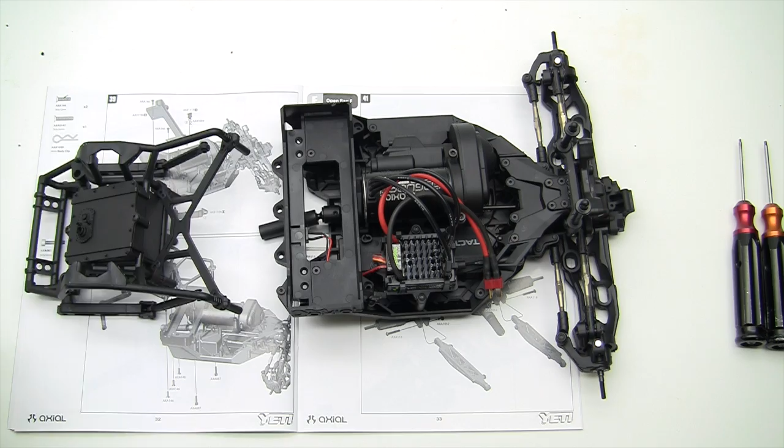Okay, rock and roll hoochie coo here. We are on to step number 40, and we are getting bigger and bigger and bigger. So we had to back the camera out here a little bit to get more room.

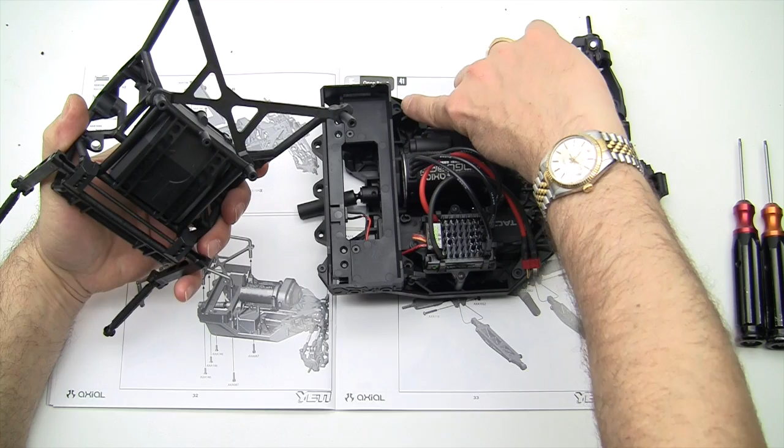Okay, we're going to install this back pod. These two feet here go into these dimples down on the back end of the battery tray, and these three go into these three holes right here.

So let's go ahead and snap that down in there. Everything should fit into the holes. You may have to do a little bit of work here to get them in until everything slips in the way that they should.

Now we're going to turn this upside down like so. According to the directions, we're going to use the two big cap screws here, and these are going to drop down into the holes here, and we will tighten them up.

Haha, you know what? I bet that's a different size wrench than what I have. Let's double check. It is. It's a bigger one, you see?

Let's go ahead and give this a try now. It's going to take a little screwing to get them in there. Just keep going until you feel it get tight. Come on, here we go. We're going. Okay, I feel it, there we go. We're tight now. Let's get the other side going.

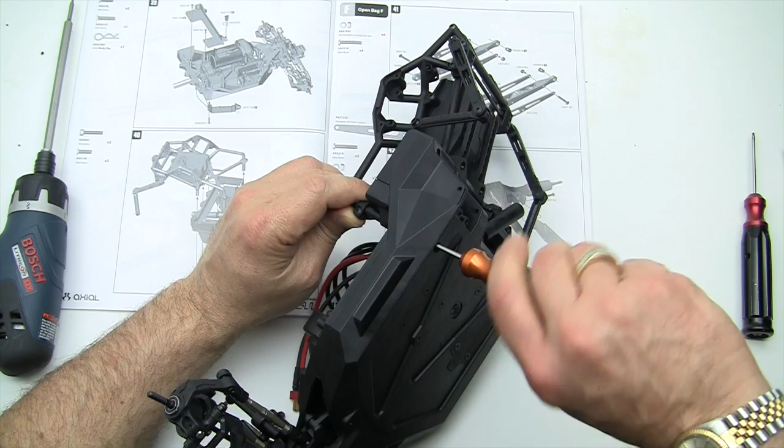Okay, now that's all sucked all the way in and nice and snug. You don't want to overdo them.

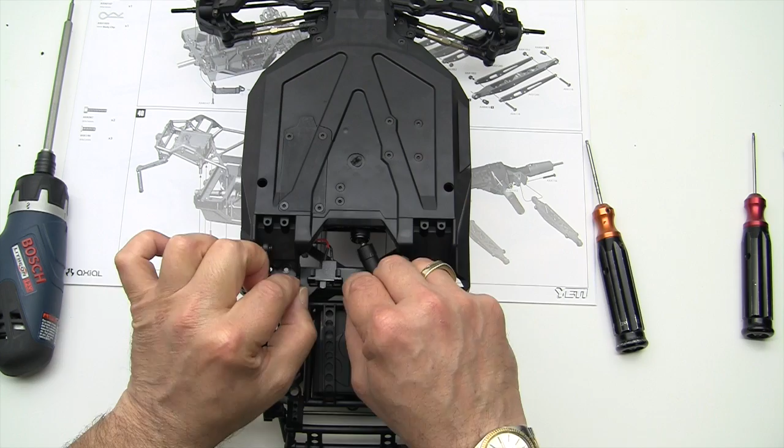Now we're going to visit these three holes back here, and we're going to put the beveled screws in there and tighten them down.

Okay. Got some visitors out in the warehouse there talking loud. Sorry about that.

Okay, those three screws are in, and we have completed step number 40. We're starting to look more like the Yeti that we're building, rather than little pieces and parts.

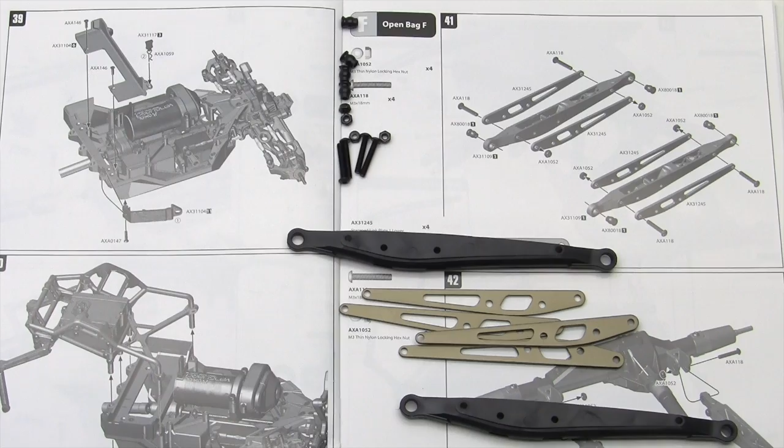Okay, so we're going to set this aside, and we are going to move on to step number 41. First thing we need to do is open bag F. Get all your pieces and parts out and ready to go.

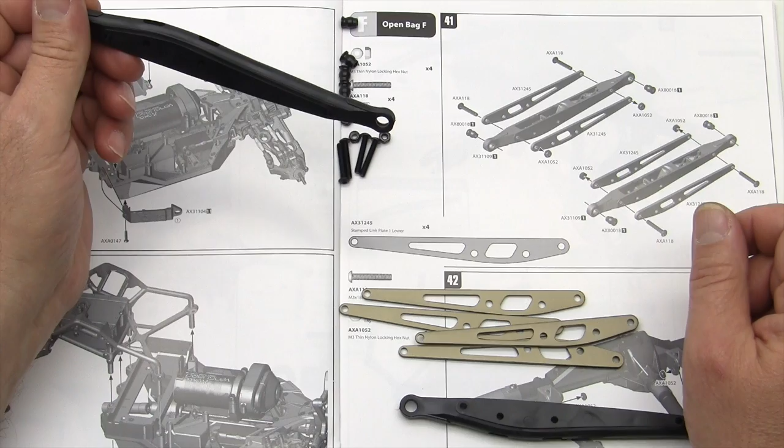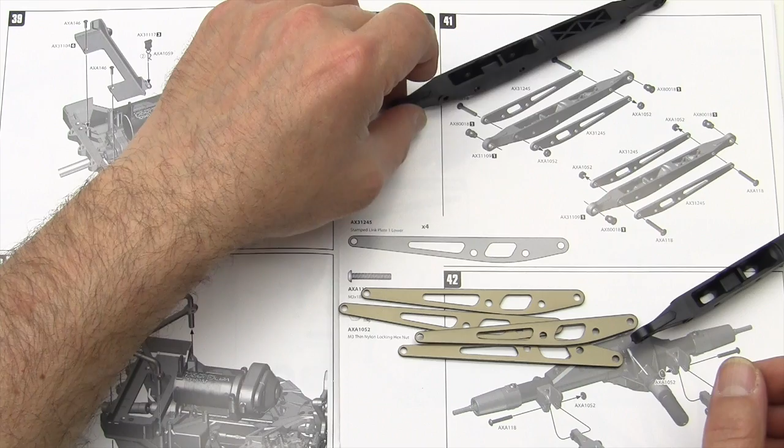Now we're going to build these two links, and you need to make sure we build them in the right direction. They're both identical, but by right direction, I mean you have one on the left and one on the right, and you want the screws to go in this way on both of them. If you take a look at the directions, it'll show you there.

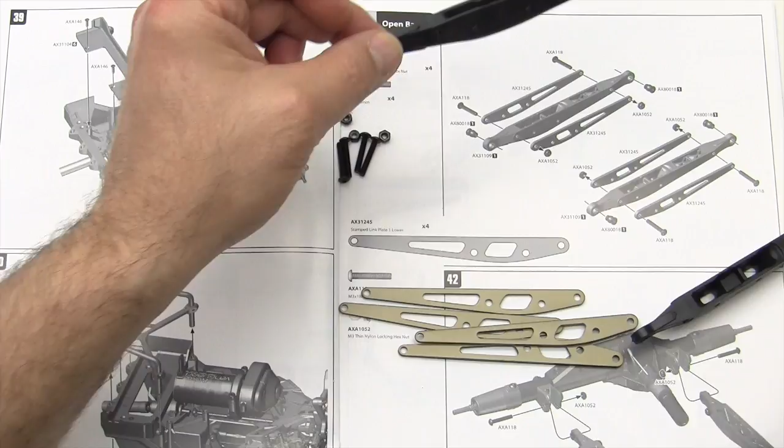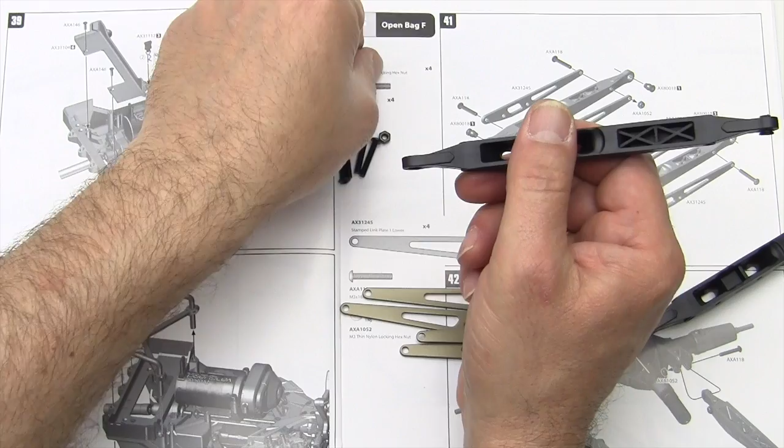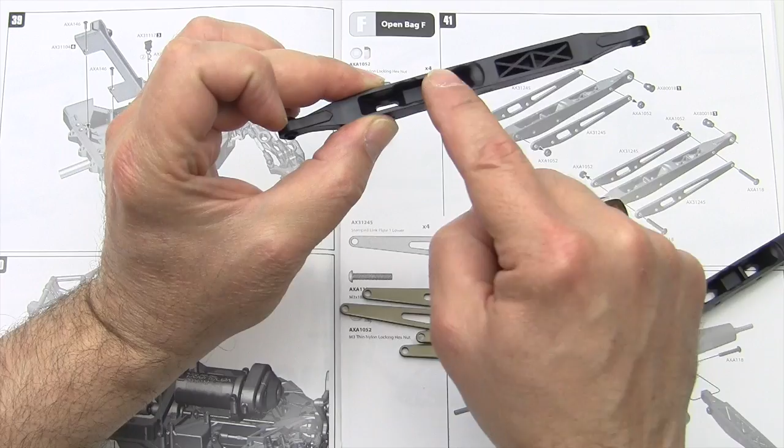Let's go ahead and start by putting in our little swivel balls, again following the directions on which way they go in. Just like so. You also want to make sure that the open part here is facing up, and that the fat part is facing forward. So we've put those in.

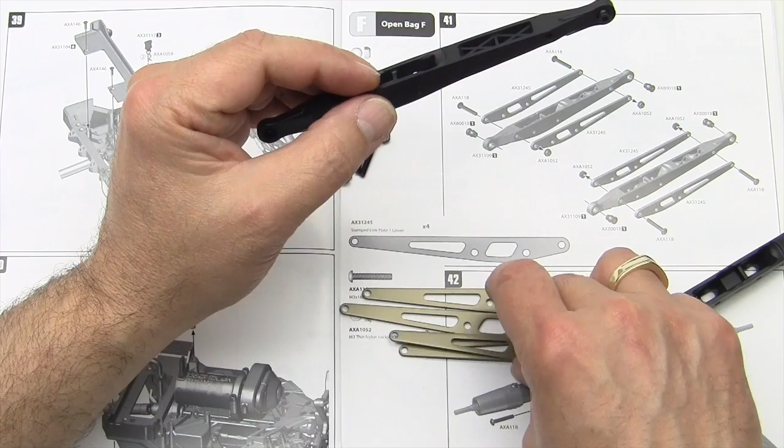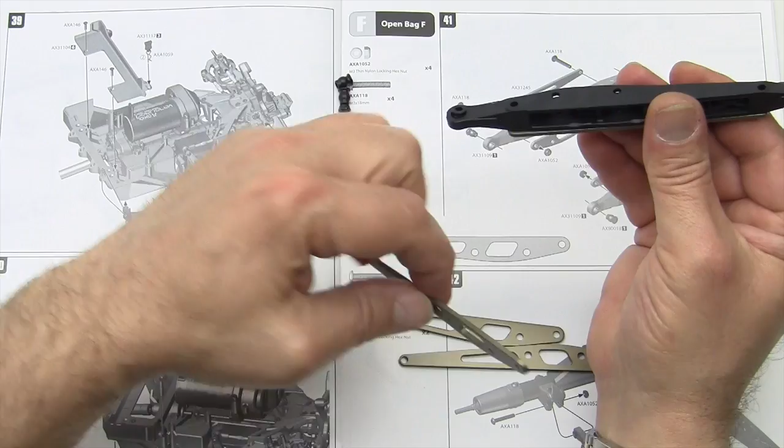Now let's take our link plates and we're going to line those up like so, on both sides. It's actually probably easier to do one at a time and pass the screws through, but we'll do it this way, passing the screw through the front and the rear holes.

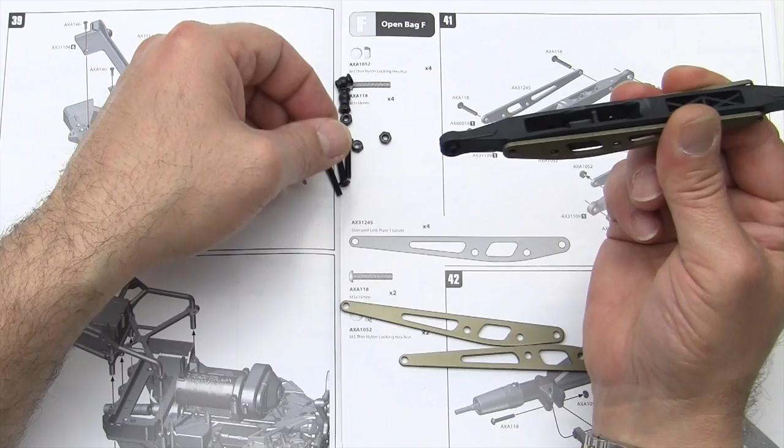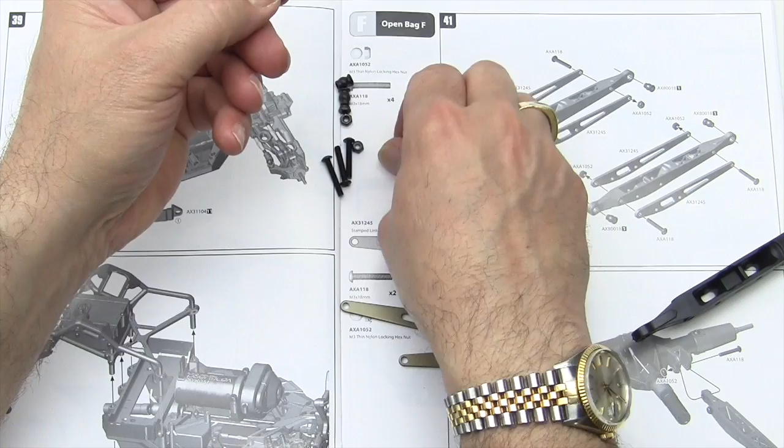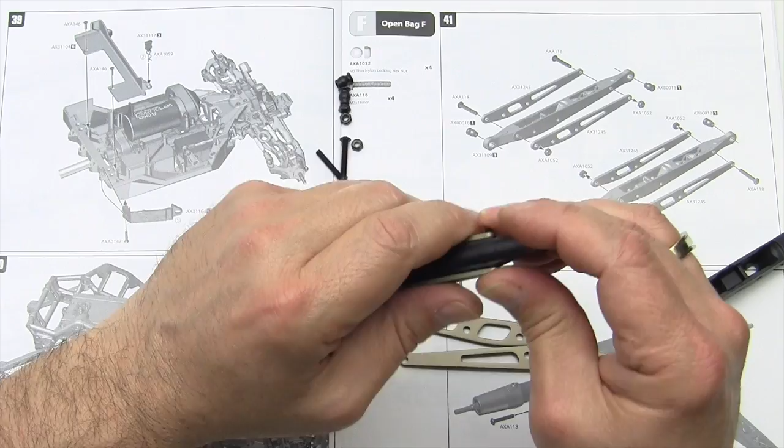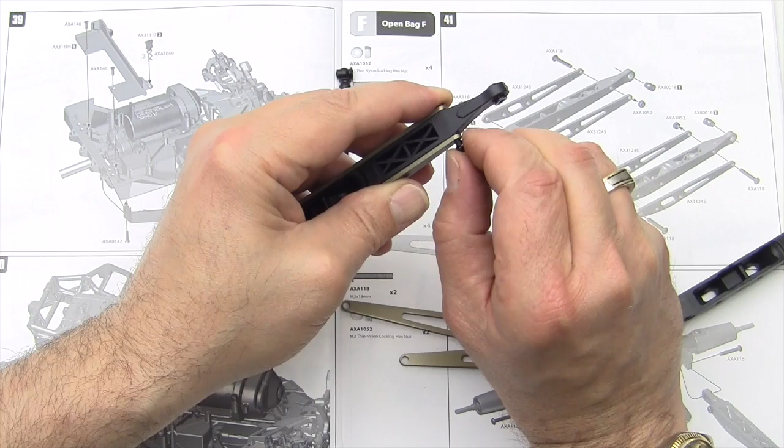We'll start by doing that and putting a nut on here, making sure they're all on in the right direction. Pass the screw through the back and put a nut on there. Come on, little nut, I have big fat fingers. There we go.

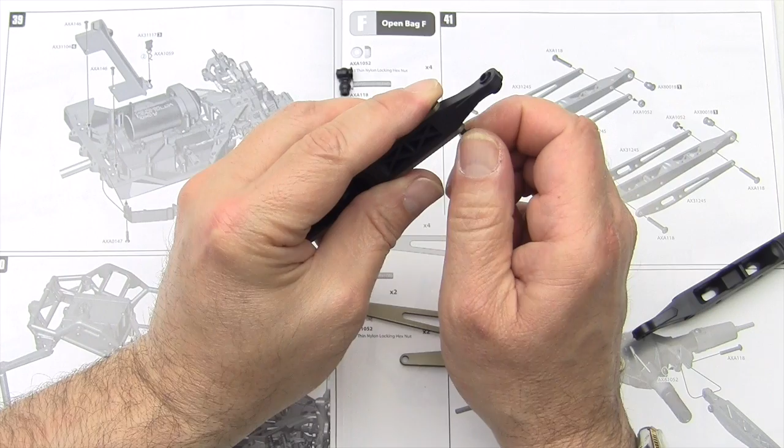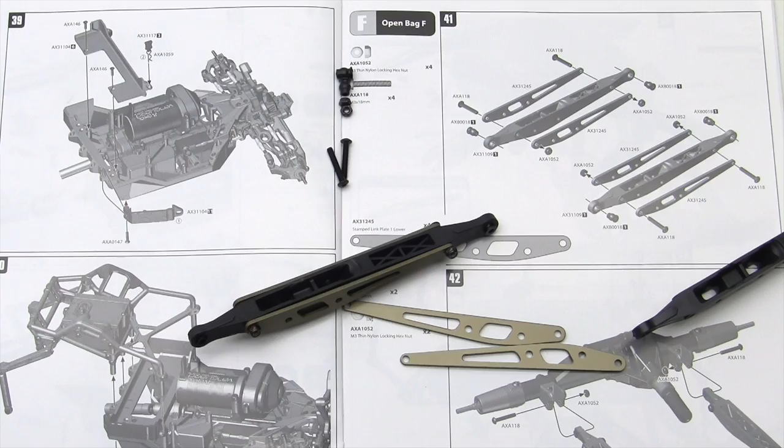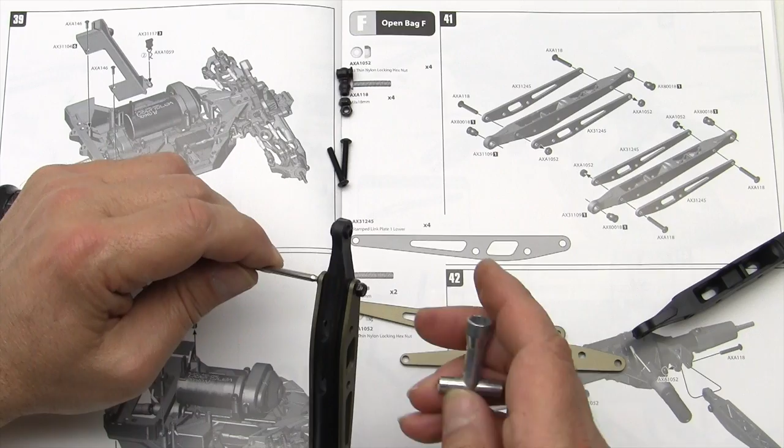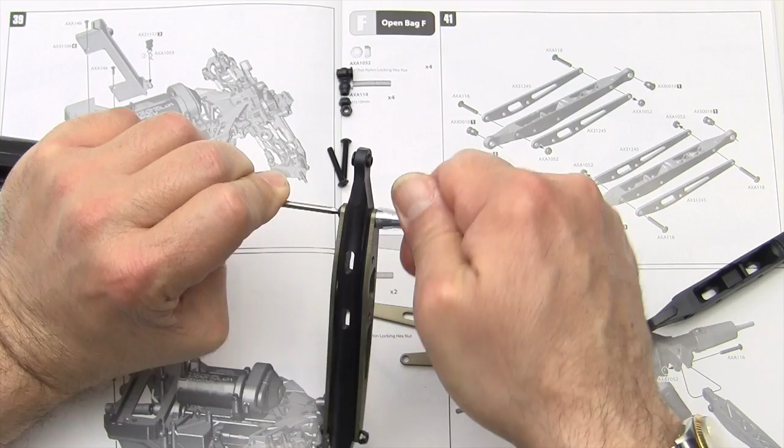Okay, somewhere on my bench here I have a little multi-tool. There we go, and the screwdriver. Let's go ahead and cinch these up. Nice little stiffener plates. Okay, there's one. Don't know why we're not putting screws in the middle ones yet, but I'm sure there's a reason.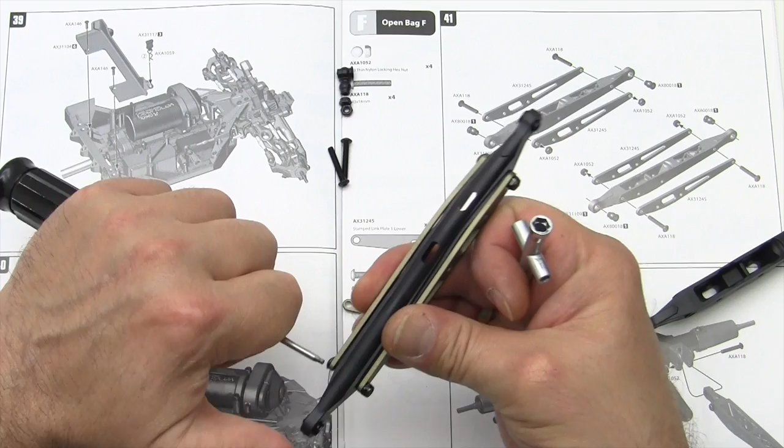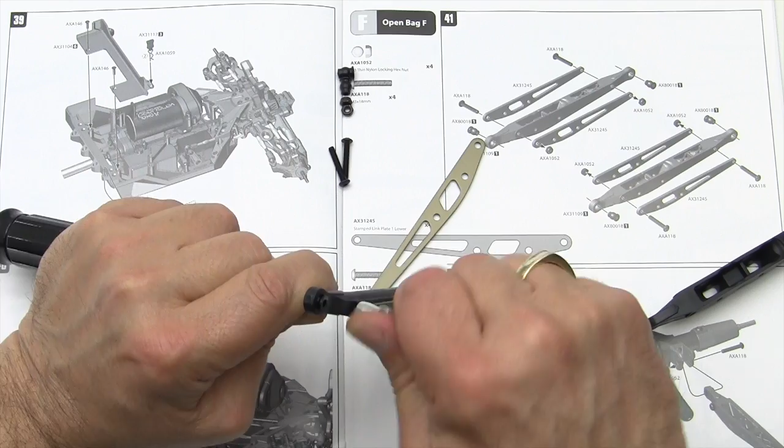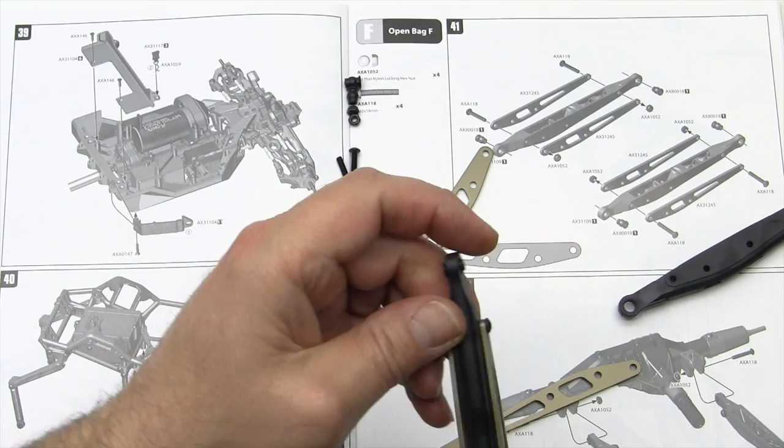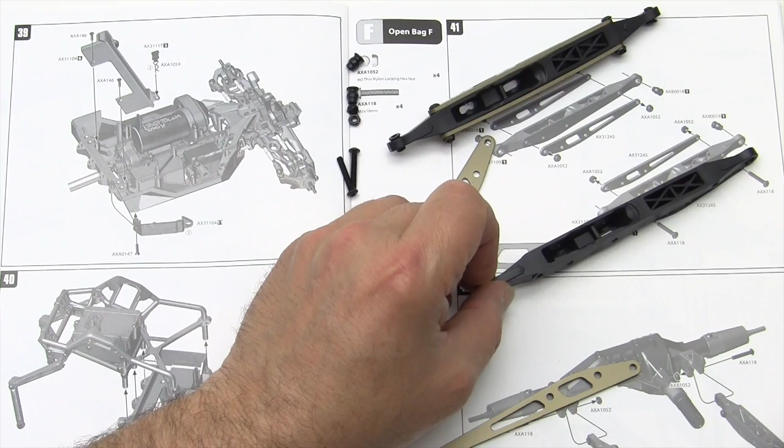Alright, so let's go ahead at this point and build the second one. What I do want to make note of is that this one was built in this direction with the screws passing through this way, and we want to build this one in the other direction with the screws passing through in that direction. So let's go ahead and do that off camera and we'll be right back.

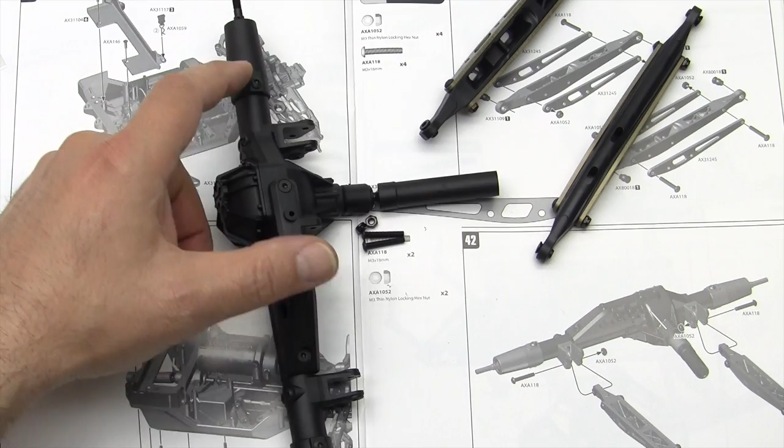Step number 42, we are going to mount the links to the rear axle. For this exercise we are going to use the bottom hole here, not the top one, but the bottom one. So we are going to put the axle in this direction here, just like it shows in the directions.

And we're going to take our link and we're going to start on this side. We want the cutouts here to go towards the axle, and we also want the screws, not the nut, but the screws to be to the outside, just like so.

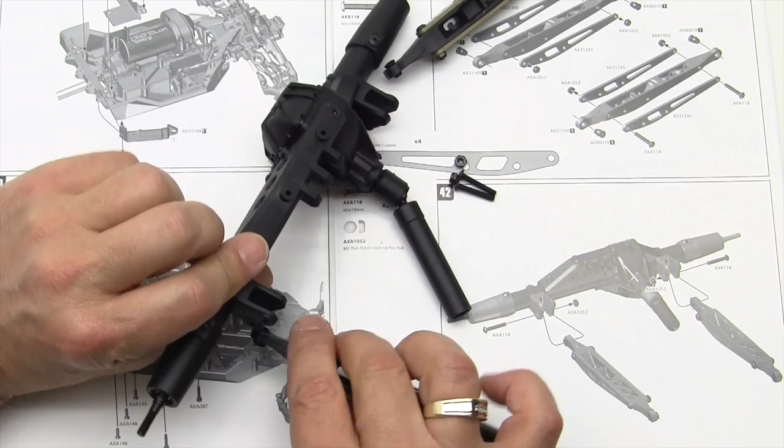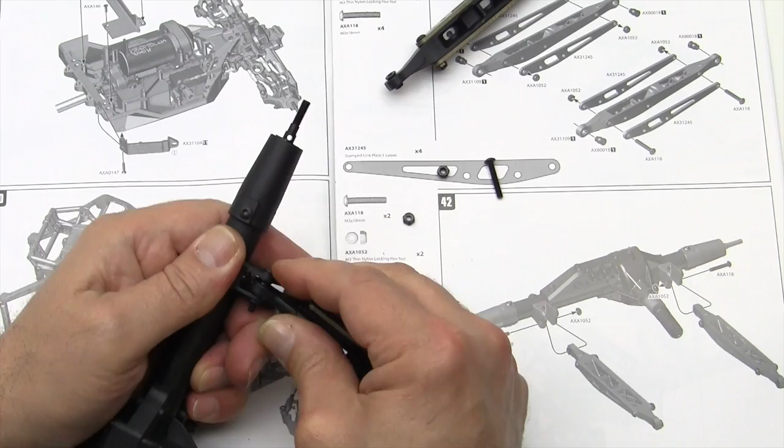I'm going to put this the way it belongs, but I am going to turn it upside down because these can be a little difficult to get in. Slide that in, pass a screw through, and follow up with a nut.

Come on. Got these little M3 nuts and my fingers just don't get along. There we go. I'm going to hold that with a little tool and tighten it up.

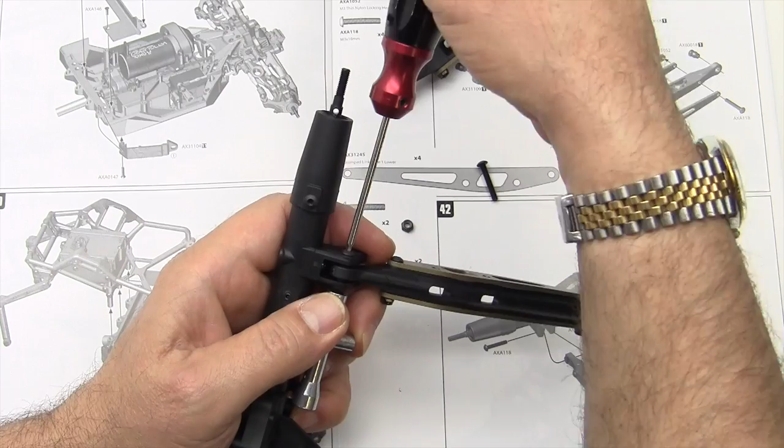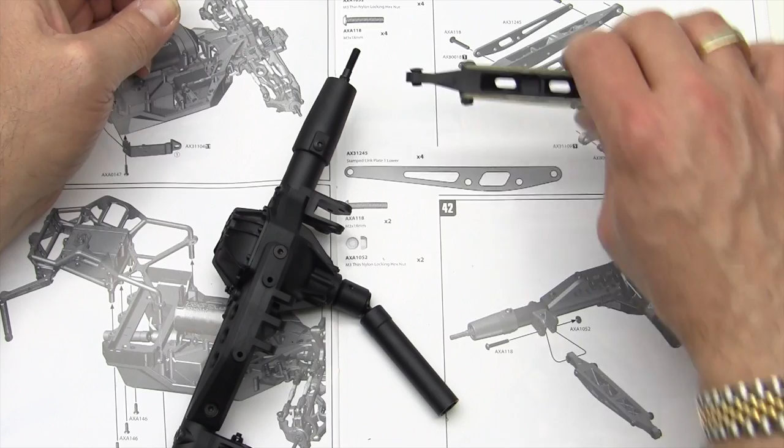And we will repeat that process on the second side, again watching our directions here. We want to make sure that the cutouts are towards the front, the screw is towards the outside, and it goes into the bottom hole. We're going to go ahead and do this off camera, and we'll be right back, I promise.

Okay, step number 42 is done. This is what it looks like when it's done. And again, you want to make sure that everything is nice and free and nothing is binding up. Hallelujah.